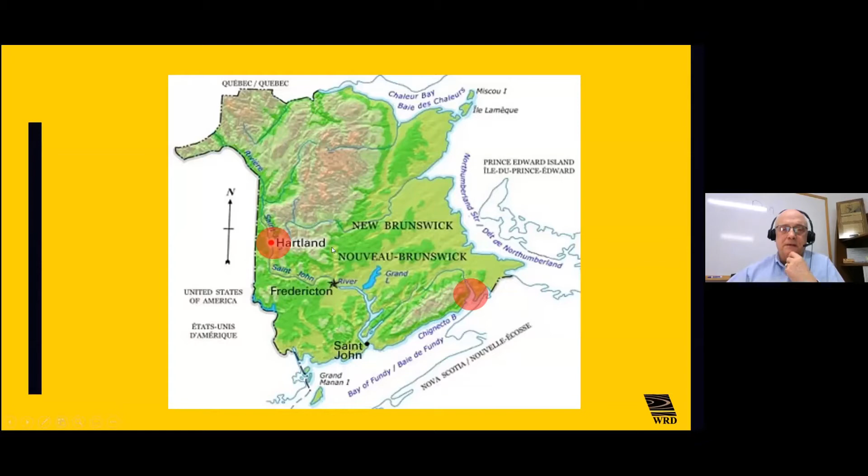And of course, in New Brunswick, we are famous for our longest covered bridge in Hartland, New Brunswick, which has been around for a long, long time. And we should be famous, without even knowing it, for other mass timber projects like Bell Dome up in Belledune—a 535-foot clear span, 12-story building for coal storage where SO2 is an issue, and potash where salt is an issue. Here you can see in Sussex and Saint John large timber buildings, which engineers, architects, and owners have understood for a long time provide a rigorous resistance to different types of corrosive environments. Timber has been shining through in that way for many, many years, decades.

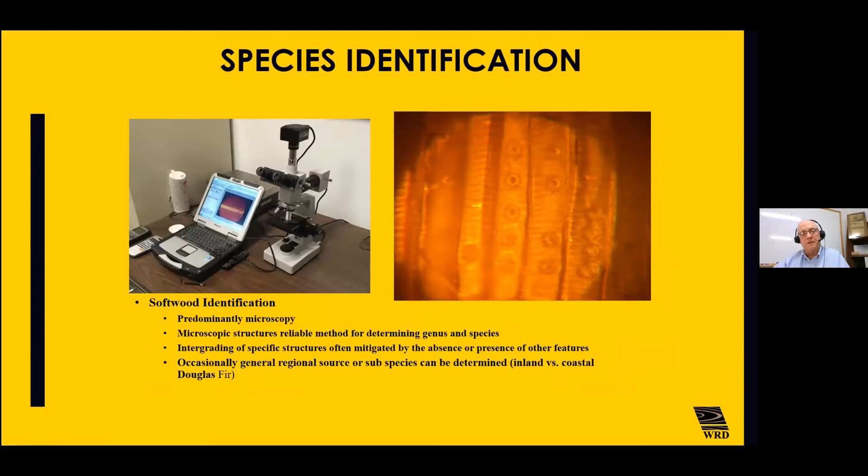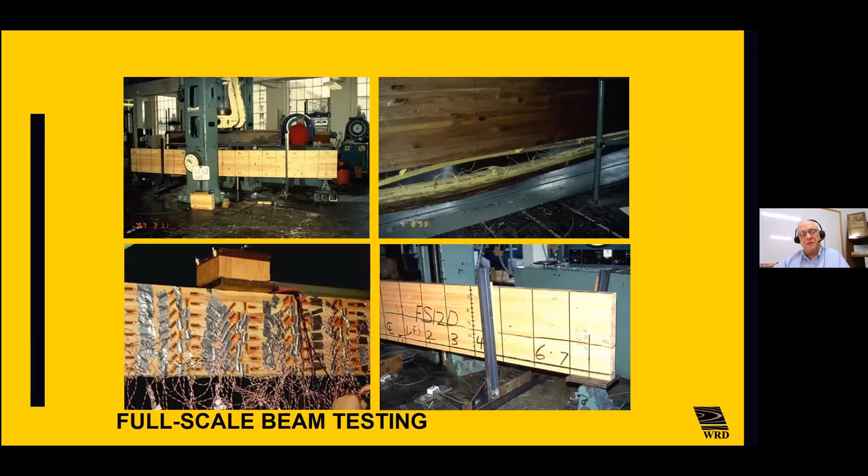Wood Research and Development, who I work for, is a code-certified test lab and third-party IAS, International Accreditation Service lab. We also have a strong, large commercial timber structures and engineering division, and we work from the small to the large in our lab. We get pieces of wood and people ask us to identify the species and grade. We look under a microscope at the smallest portions of a piece of Doug fir, for example, where you see spiral thickenings on the cell wall—a dead giveaway for Douglas fir—through to other characteristics we look at to identify wood at its smallest and minute level. From there, we go to the big levels, testing full-scale beams with our big beam testers, where we test reinforced glulam beams and other large timber products, strain gauging them and measuring deformation under deflection to understand their physical and mechanical attributes.

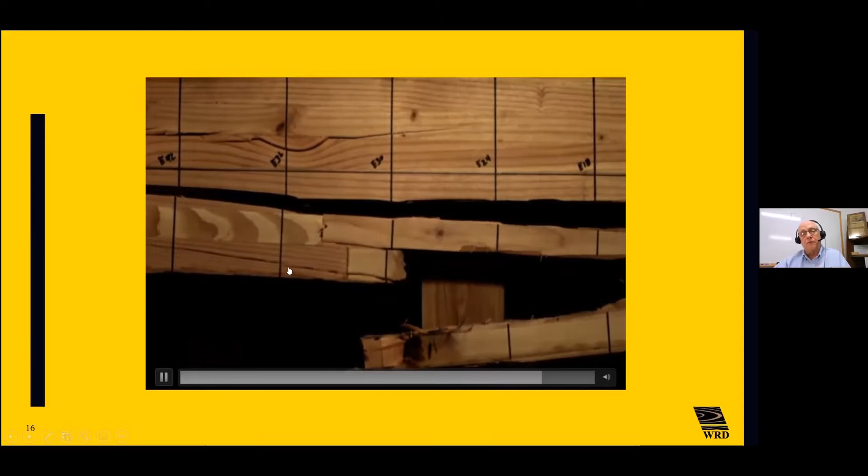This often leads to understandings about shear stress distribution in beams, using high-speed video where we take a post-trigger and look at the effects of stacking two finger joints in the bottom of a glulam beam, and the effects of joining a very dense and a not-so-dense lamination with a finger joint. Part of what we do at the lab is understand the response mechanisms to load and solid sawn lumber—how to fix solid sawn, for example, with high strength fiber—to establish design methodologies for code approvals.

Part of our work at the lab has been producing and developing high strength fiber using carbon, glass, and aramid, that's Kevlar, to produce high strength fiber layers that we can use strategically in different wood and wood composites, where they're 5 times the strength of steel at a fifth the dead weight. They come on a roll, you can stretch that roll out 2,000 meters if you want, and cut it in pieces and put it where you want.

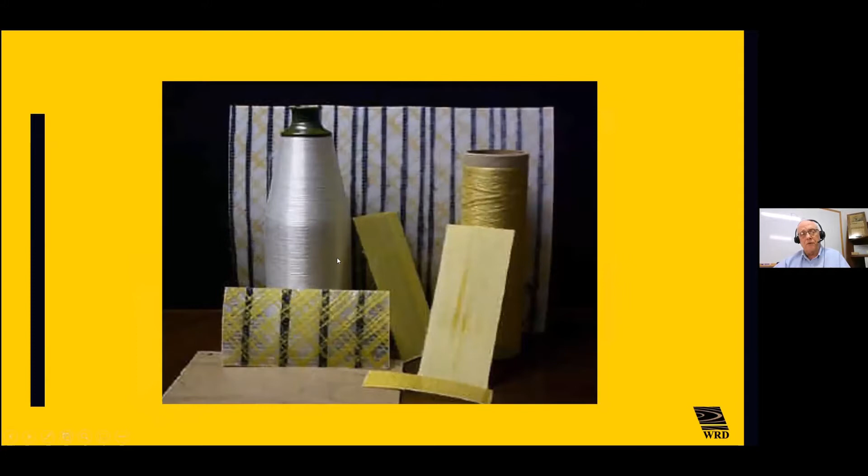So this has led to, well, I don't want to brag, but it's important to know that what we talk about with wood and ways of reinforcing it is bona fide. In '96, we were nominated for the Civil Engineering Research Foundation Charles Pankow Award for Structural Innovation, and in '97, the Construction Innovation Forum Award for all construction products. We were fortunate enough to win both of those back-to-back, the first time ever won by wood in the world.

That was the beginning, in many ways, 25 years ago, of this great move we see back to wood now in this last decade. This has led to other award-winning projects like the Nappan job near Amherst, Nova Scotia, and the Roger Bacon Bridge, where we won the Merit Award two years ago.

This is an important aspect of protecting technologies, but again, as a Canadian, it's important for me to think about these things. We were successful with over 40 patents in this whole area of wood and wood composites.

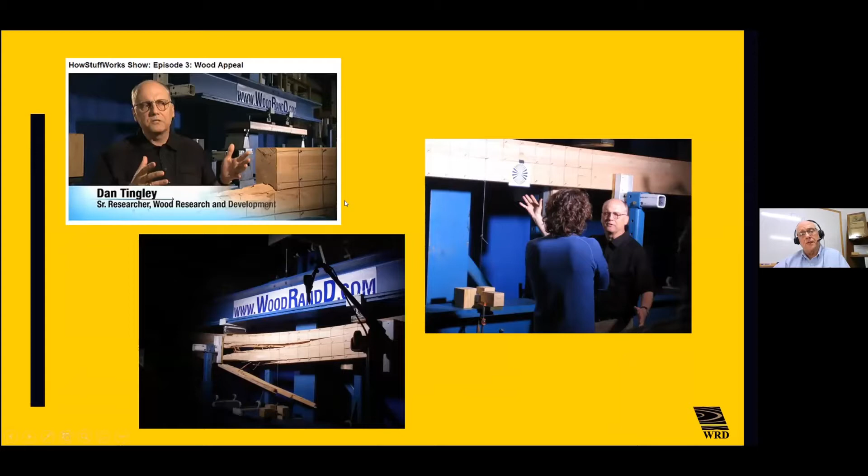So enough bragging. This has taken me through a career where, from HowStuffWorks on the Discovery Channel to being around the world looking at different wooden structures and helping people understand how to fix them, how to extend life, and understand what's going on with their structures.

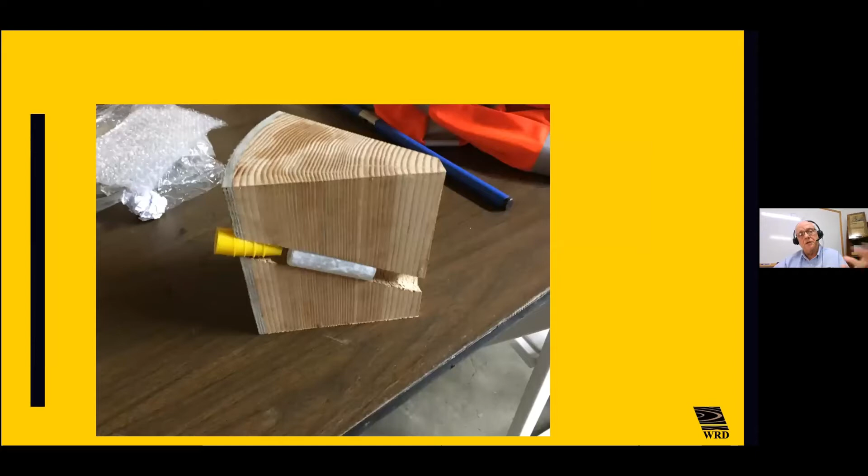As you can see, a class here in Salisbury, with a fellow from South Africa and a guy from Italy working together to develop a restoration for poles and wrapping for piles, diffusing and using naturally occurring salts to preserve and extend the life of species that are not treatable, like spruce. This leads to certificates of completion for people who attend.

So enough of that. Timber is one of the oldest bridge building materials that's been around, and both bridges and buildings have been built out of wood forever, it seems, originating back to the 1500s, even 15,000 BC. Timber, the material, is readily available.

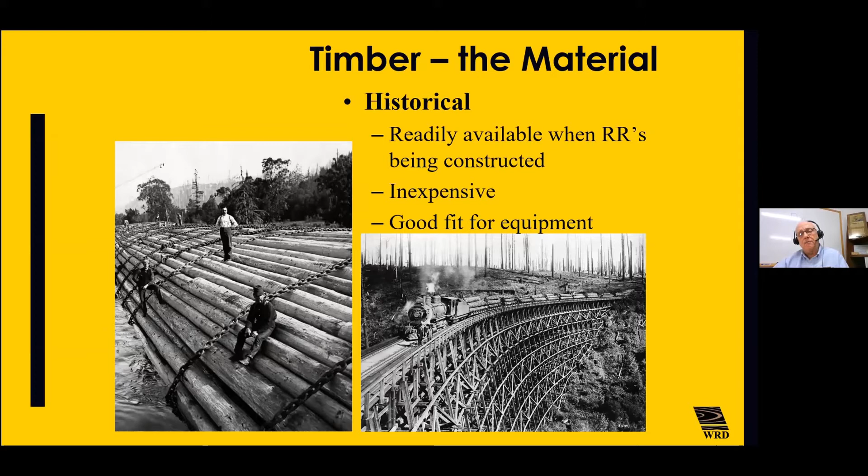Where you go, timber. In the old days, we used to build a railway across our continent, and we'd reach a gap, a river, or a big gully, and they'd cut down the trees that were there to build a bridge to get across it. This was the beginning, as it were, of the use of timber in a more capital infrastructure way. Timber formed the backbone of how we build things and what we use as a material to design with.

These are the important aspects of our history with timber. The breadbasket of the world really became the northwest part of the United States and the western part of Canada, where these huge trees were felled. You can see one tree, one train - it was location, location, location. It was about where the wood was, and that was what you used, because it was local and people could get at it, machine it, design it, and build structures with it.

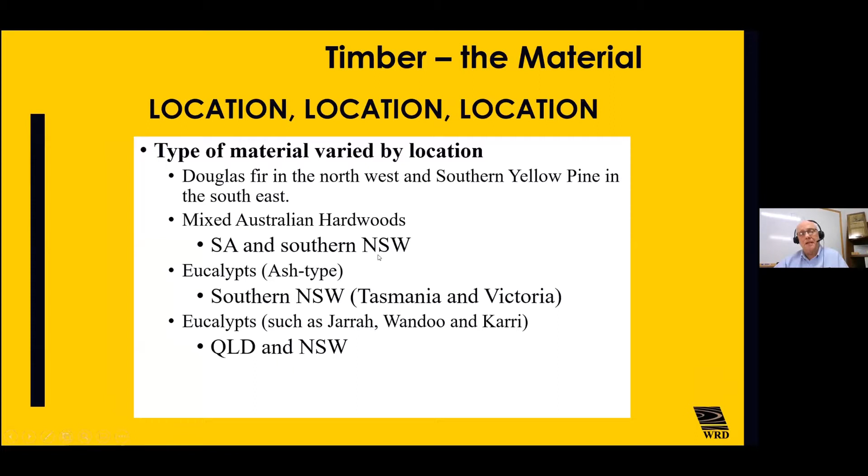As you can see, the size of the Doug fir here cut down, these are some big trees. And I often say, if you can't make money cutting trees like this down, you want to get out of business.

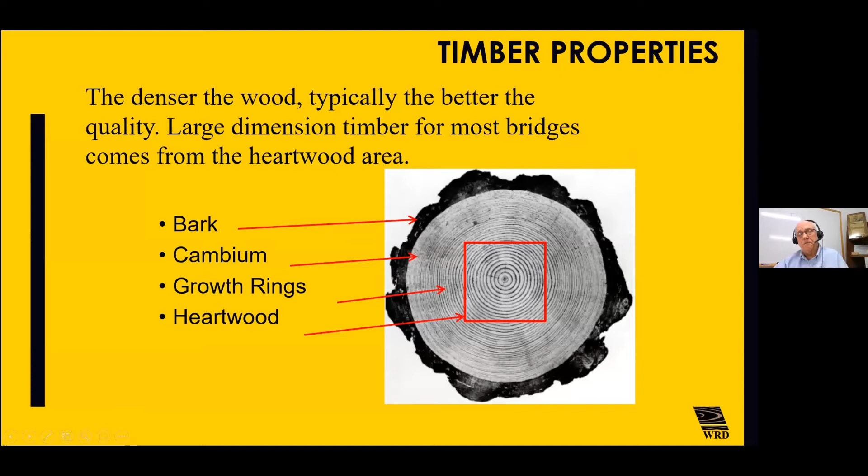Huge trees providing a breadbasket to build the world, as it were. Trees have timber properties and they kind of grow the same way. They get bark, they have cambium, the growth area in the log, and there's growth rings, heartwood and sapwood. This breakout of a timber cross-section of a log is the same around the world.

Timber properties - you hear oftentimes the old growth timber, you refer to it as old growth. These are the old Doug fir trees, for example, and redwood and western red cedar - old trees that are large and growing at tight spacings. You often hear people say this old growth is gone, and this means we can't have strong wood. Well, that's just not true.

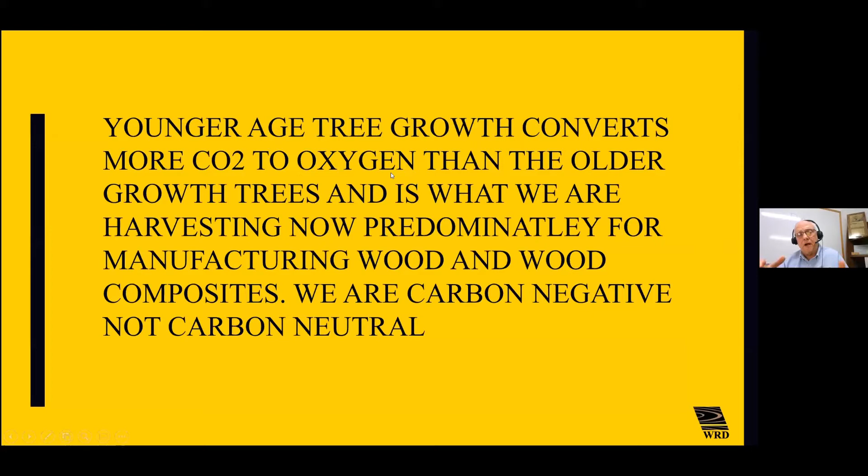Younger trees, for example, convert much more CO2 to oxygen than old growth trees, and we are carbon negative through that - we sequester carbon. Our old trees are good to walk through and good to keep for the heritage, but really the regenerating trees that we plant 2 for 1, that we can then saw down and make into things, make into composites of wood, are the way forward for us, because it's sustainable.

Taking these regenerated trees that are planted 2 for 1 and growing forest with them allows us to sustainably create building materials and not pump CO2 into the atmosphere, but instead convert it to oxygen and sequester the carbon, keeping that carbon sequestered in structures that we build around us that are aesthetically pleasing.

So we often say good wood is gone - it's harder and harder to find, and quality wood is just not there because we have to deal with regen. Well, I want to tell you that it's far more common with wood structures that it's how we design, manufacture and work with this that causes the premature failures than it is the wood. It comes from a lack of understanding.

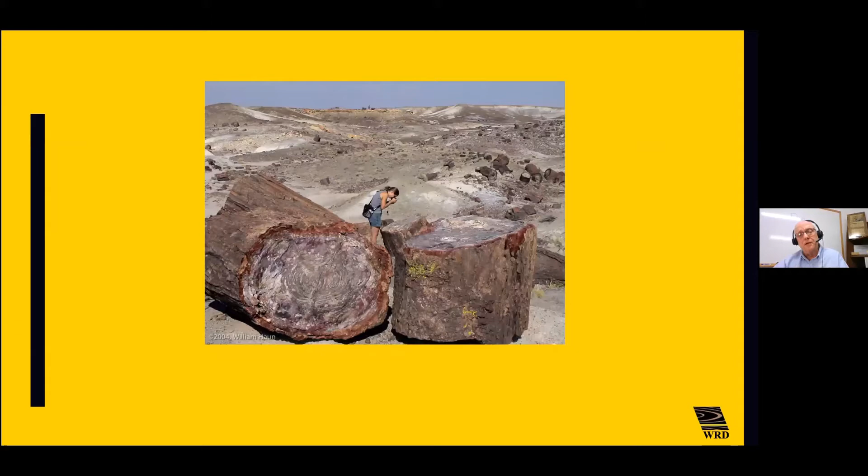I often show this picture of the petrified forest in the national park in Arizona, where Doug fir trees are laying in the ash that have been uncovered from the winds of time. They kind of got together in the great inland ocean. When the ocean receded, they settled and mineralized and formed into agates, basically becoming petrified. They've studied these petrified chunks of log and found out that these Doug fir trees were growing 250 million years ago, the same way they're growing today.

And those trees have not changed in how they grow. They basically have the timber properties that originate from how they grow - cambium and growth rings, for example, and rays, and early wood and late wood. These cellular structures are what forms up timber. And timber has 3 principal directions of strength - it's anisotropic, meaning it has different properties in different directions. It's got a radial direction, a tangential direction, and a longitudinal direction.

In the radial direction, the modulus of elasticity and tension is different than the modulus of elasticity and tension in the tangential direction. And if you try to design timber like you design steel, you're going to make some serious mistakes. And on top of its anisotropic nature, wood also is hygroscopic.

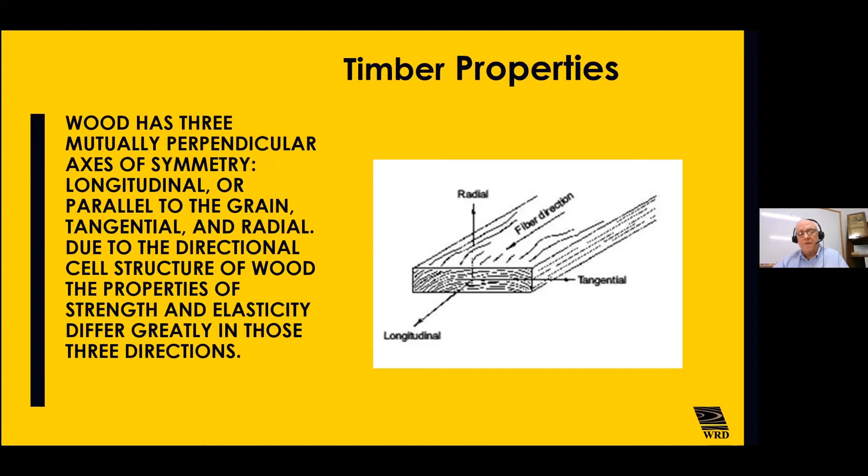It breathes in and out moisture. After all, it was a living organism in its origin, and it breathes in and out moisture and equilibrates with its surroundings. So those 2 big factors are important to consider when we design with it. It's a collection of cells bound together by lignin, the glue, and this collection of cells has properties that are related to its orientation and how the cells and lignin formed it up.

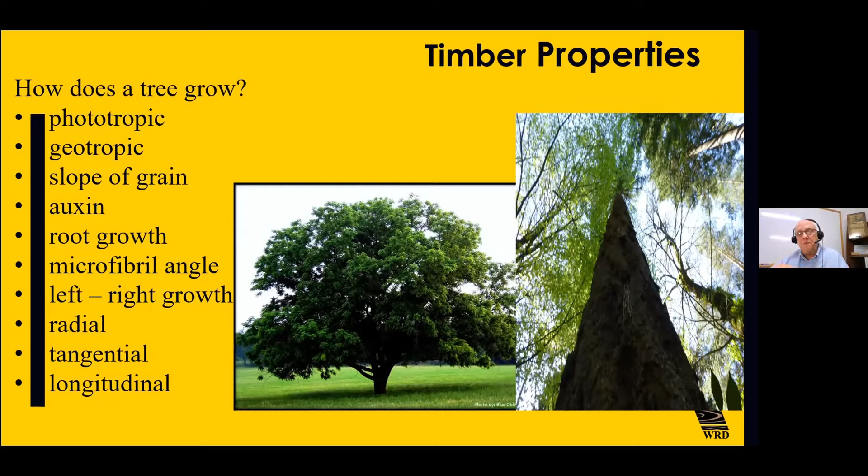Timber's properties, for example, between hardwoods on the left and softwoods on the right - the softwoods are geotropic, and they grow in response to gravity, straight up and down, so they tend to have less slope of grain issues. Hardwood trees on the left are phototropic - they reach for the light. They tend to have more slope of grain issues, even though they're denser and more complex. These aspects of timber are important for engineers to understand as we design with it.

This anisotropic slope of grain and strength issues that relate to how we cut pieces of timber out of the log are also important, because slope of grain relates to cutting a straight piece of lumber out of a tapered or round bolt or log.

Timber is hygroscopic, meaning it breathes in and out water. There's a point where it's giving off water, cell water, what we call free water or lumen water, where it doesn't shrink with change in moisture. When we get down to cell water, that's the bound water in the cell walls. When it loses moisture from that point, it shrinks. That's called the fiber saturation point, around 25 to 30% moisture by weight.

When wood drops below that fiber saturation point, it begins to shrink, and as it moves in and out of moisture below that amount, it shrinks and expands. So we take engineered wood products like glulam beam, manufactured between 12 and 15% moisture content. One key reason is because that's right in the middle between the fiber saturation point and zero, meaning it shrinks and expands the least amount.

It's more stable. LVL and some other engineered wood products are made at 8 to 10% moisture, drier than glulam, or what we call structural kiln dried wood, which is dried to 19% or less. Different types of engineered wood and different types of sawn wood are at different moistures. So when I hear the term 'wood is kiln dried,' the first thing I say is, kiln dried to what?

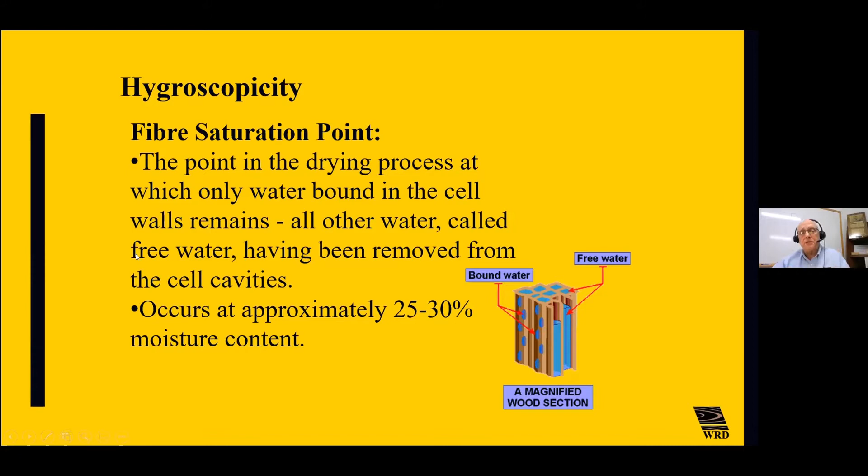This fiber saturation point is a critical point - why? We have to understand that wood shrinkage longitudinally is negligible, but its shrinkage tangentially and radially is very important. It changes the game, as it were, on multiple story buildings, for example.

Rays transfer moisture in and out of the radial section of the tree, and they're kind of nature's natural fault line as the tree shrinks and expands. That's where you see these non-structural defects forming in timber. If you don't know this is a non-structural defect and you're looking at this log in a log girder bridge system, the first thing you're saying is it's shear failed.

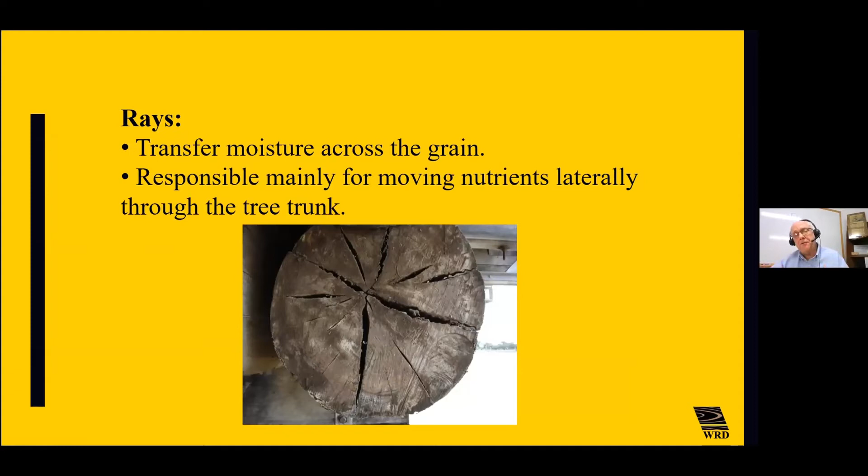Well, that's not shear failed at all. It's a naturally occurring shrinkage check, because at the end grain, travel of moisture is 100 times faster than the side. That tends to lead to end checking and end feathering.

These vertical cells that take moisture up and down the tree kind of move along naturally. Just because the tree is cut down and sawn into timber doesn't mean moisture isn't going to move through the cells. So when you put a pile or a column in the ground and it gets groundwater, the water moves up in that tree the same way it did when it was living, by capillary action. Water moves through and in around wood a lot.

The specific gravity of wood is the ratio of the wood's density to the density of water - that ratio is unitless. Wood has all kinds of different specific gravities. Some wood, like ironbark, sinks when you throw it in water - it's denser than water. Other woods, like balsa and western red, are a third the density of water. Typically this density is related to the wood's characteristics and strength, but other localized defects like knots and slope of grain will also impact that design property in the wood.

These properties related to density usually mean that the heartwood is kind of more inert, and the sapwood is kind of more open to moisture travel and permeable. They impact the quality and condition of our elements as we use them.

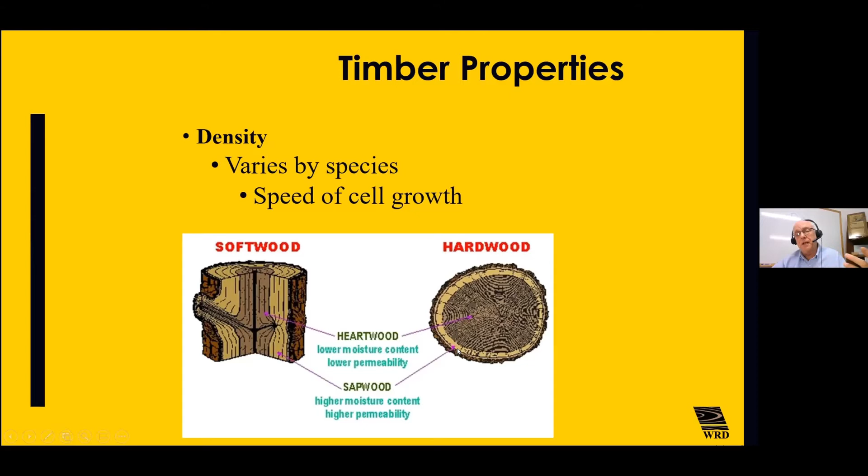Typically in days past, wood was sawn around - we'd take a big square bolt out of the center after we cut the jacket wood, as it's called, into the kind of higher grade wood, because there'd be fewer knots. The boxed heart timbers were used to build bridges, heavy timbers for post and beam homes, for example.

Timber properties are affected by knots, splits, checks, temperature, moisture - all impact the design properties. Most of these design properties have been developed from understanding things like wane and knots and the size of knot in a section, and things like checks and seasoning issues. They're reflected in the design values already published for use by engineers.

Other things can affect timber, like temperature, although it's got very good resistance up to 150°F in terms of its strength.

At extremely low temperatures, if it's green, wood can shatter because of sudden impact. For example, in the deep freeze up in the boreal forest, like in northern Canada, when cold comes in quickly before the tree's moisture content has dropped into its roots, you can hear loud reports where trees literally split because of freezing water in them. So temperature does impact timber, but not to the extent it would in steel. Its coefficient of thermal expansion is much, much lower than steel.

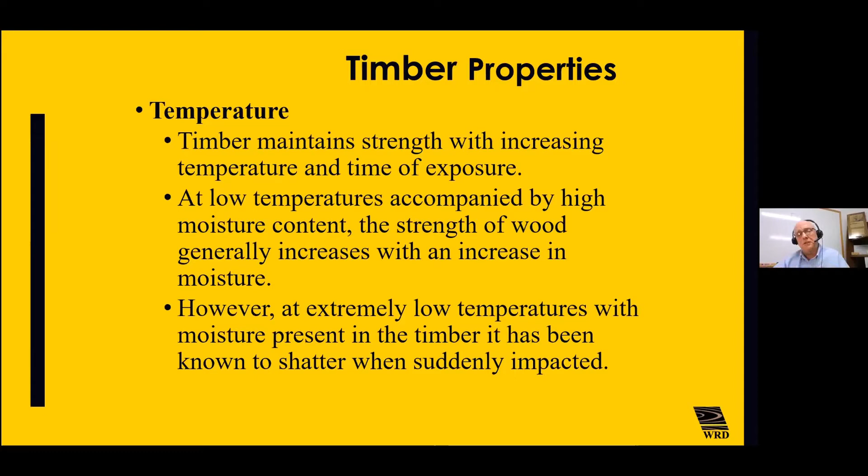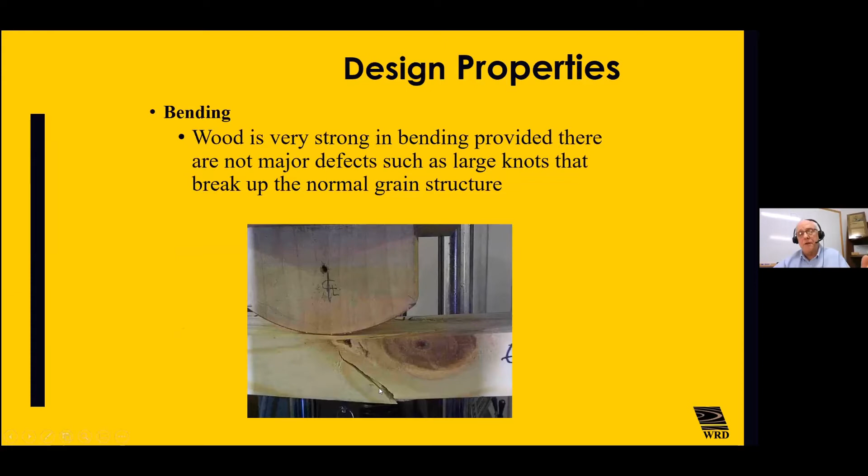A timber's properties are also impacted by moisture. Generally, modulus of elasticity and strength increase with a decrease in moisture content below fiber saturation point. Wood's bending properties are heavily impacted by knots and slope of grain. If you have bigger knots in a smaller cross section, you have less strength. The knot itself is denser than the wood around it, but it's the slope of grain around it that creates localized defects leading to reduced strength and capacity.

The same goes for compression parallel to grain for columns, and the same for compression perpendicular to grain. Most people don't realize that compression perpendicular to grain strength values are a specific criteria. They represent the capacity of the piece to accept a bearing perpendicular to grain, and it's the stress that causes one millimeter of deformation. It's a specific characteristic, not a strength characteristic.

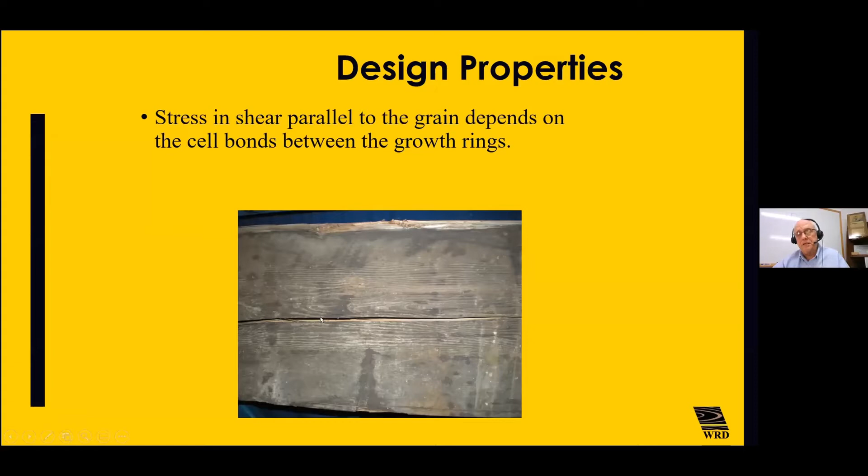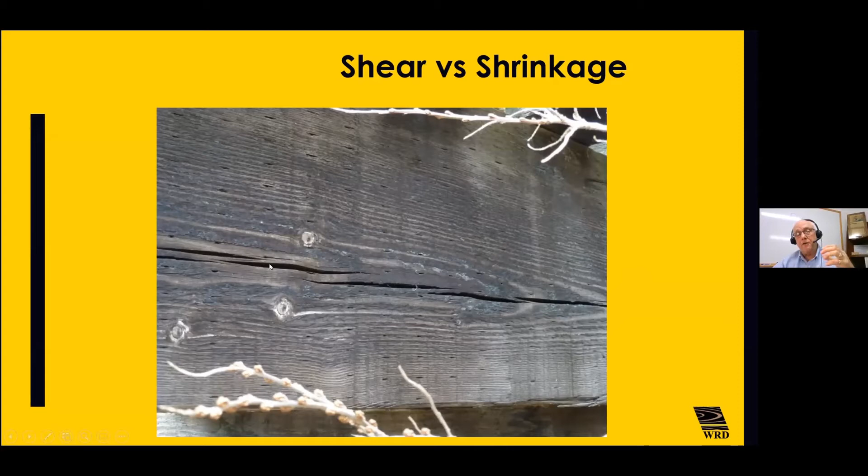60% of all horizontal shear failures in wood occur along the late wood, early wood interface, as you can see here - that's a horizontal shear crack. That's a horizontal shear crack. That one is not - that's a boxed heart with a shallow grain at this edge, and that's a ray. It shrinks as it seasons, and as it does, the cells circling the annual ring shrink and lead to nature's natural fault line, a ray, which separates at that point. That is not a structural defect. This is not a structural defect.

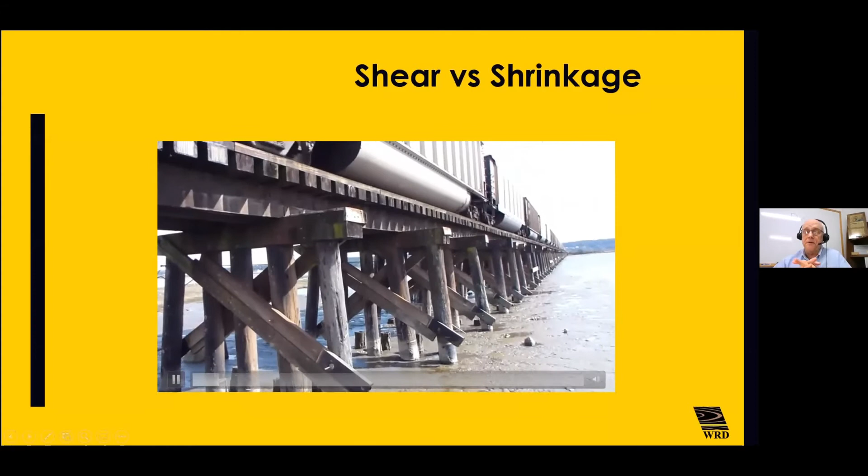So there's a difference between a shrinkage crack and a horizontal shear crack. This is a shrinkage check. This is a horizontal shear failure. I wish I had been able to see a video like this when I was in my undergraduate program at University of New Brunswick, because I always thought shear was a transverse deal since the formula has V times A.

That's horizontal shear, and it's overloaded because of heavy loads. The horizontal shear is rubbing the wood back and forth, and the white is the wood powder coming off. The vertical spikes from the top are from water flushing out that wood powder. That's a horizontal shear failure.

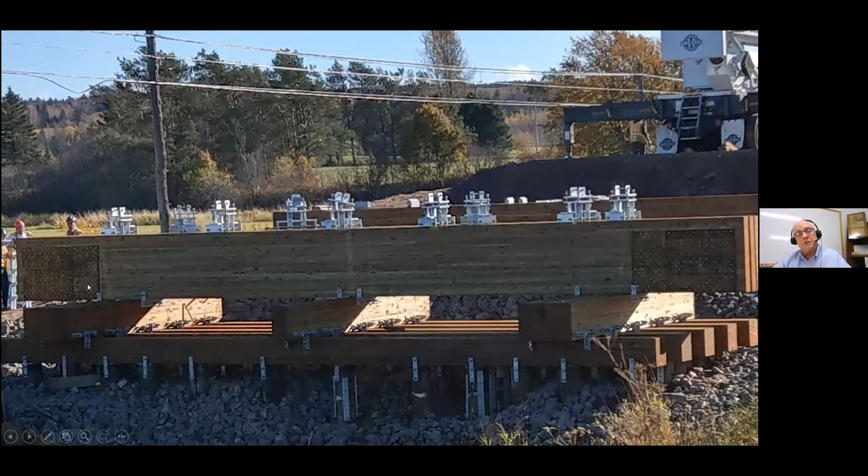Horizontal shear failures can be improved by adding horizontal shear reinforcement. As you see with this big cap here for the Nepean Bridge, we put a horizontal shear panel on, and that carries a huge point load. So instead of having to increase the size of the beam everywhere, we can strategically place horizontal shear reinforcement to increase the capacity of that piece at a point load and build the bridge more economically and effectively.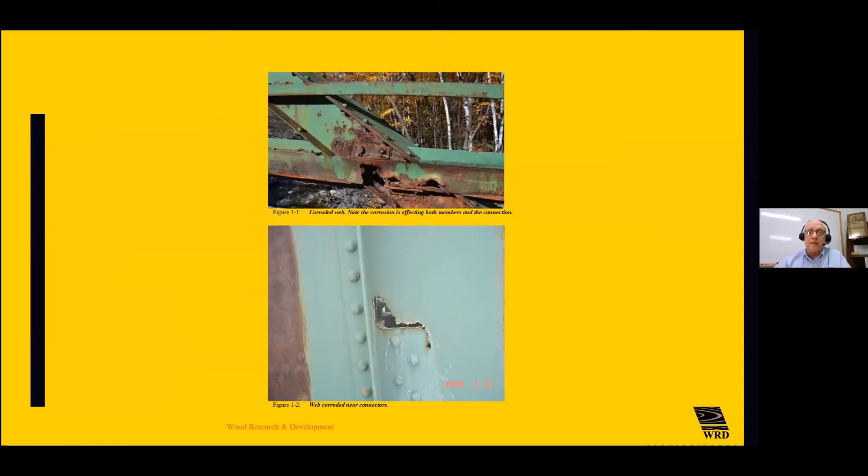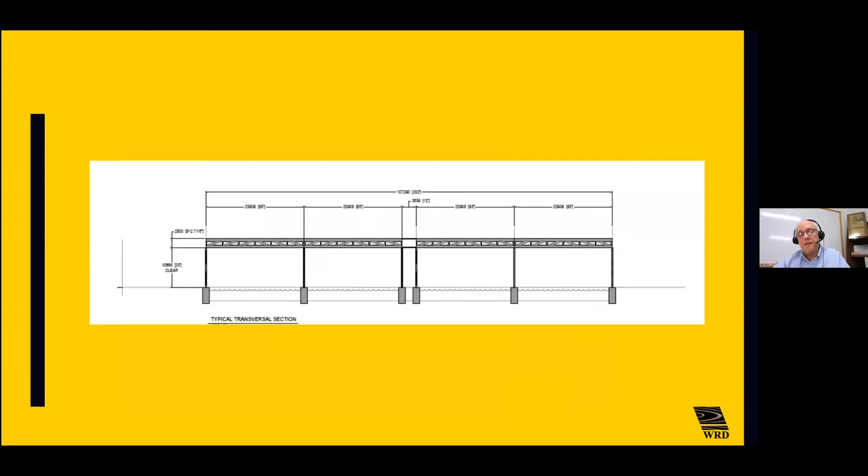Timber has naturally occurring resistance like this - it doesn't rust. That's why we use wood in swimming pools, for saltwater pools and chlorine pools, because wood has great natural resistance to these sorts of environments, like salt for potash terminals, like SO2 for coal storage. That's why we choose wood - because of this naturally occurring resistance that makes it the right choice for things like fish hatcheries, where we can produce naturally occurring wood products that are sustainable, carbon friendly, and will go the distance in hard environments, like a pulp and paper mill with steam.

These are all timber beams in the roof of this pulp and paper mill, because they know they do better in these environments. So timber can be quite durable.

Timber does not behave in a truly elastic mode when it's under time-dependent behaviors. That's why we have in its composite adjustment factors a DOL, duration of load factor, of 1.6, because timber tends to have a viscoelastic response, and over time will creep. And if you put too much load on it, then it can creep to failure. So we adjust for that.

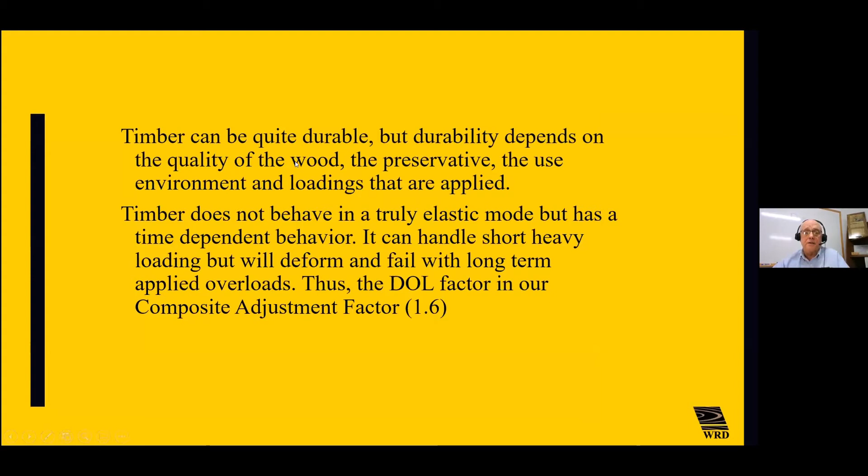So when people say that timber creeps and that you can't use it as a structural material, they don't understand that we've already accommodated that in our design values and in our composite adjustment factors, and that you can have timber carry loads.

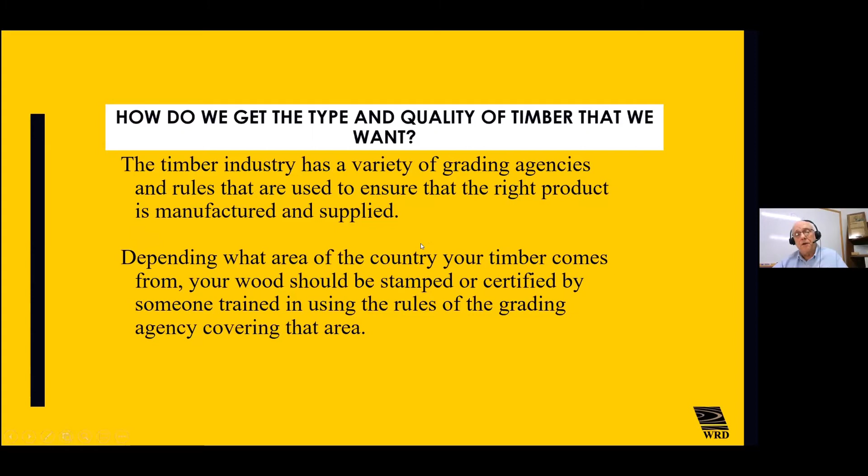Our design standards work like this: our National Building Code, our 086, our Timber Engineering Code, and then the Highway Bridge Code, which stands between 086 and the site, our Wood Preservation Codes. These codes allow engineers to go into the marketplace and design timber for people in different uses and produce for clients a working drawing set that will allow them to go out with a contractor and do the right kind of job at building their structure.

So who stands between the designer and the design codes? Well, there's grading agencies. These grading agencies provide ways for manufacturers of products to be able to grade their materials so that they put a stamp on it that relates to the drawings that the engineers have used, because that stamp and grade of lumber is covered under the design standard, and the engineer uses a design standard to choose the right choices for his design. And then he puts a drawing together and puts on that drawing what grade it should be.

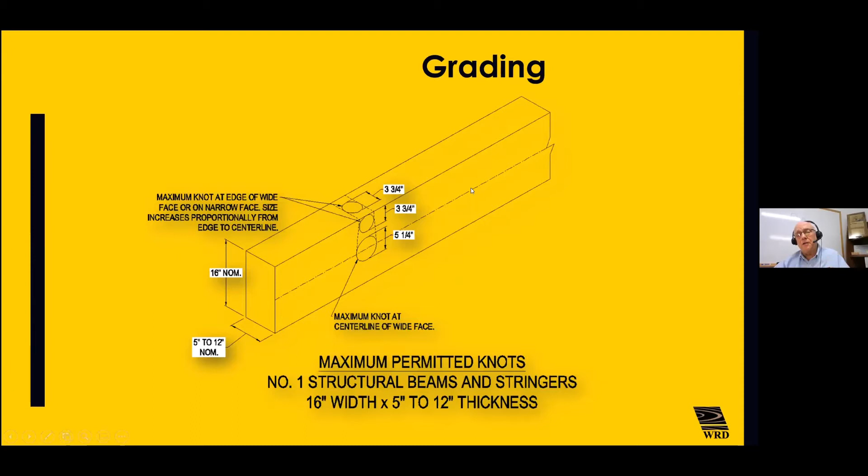I was never taught one time in my undergraduate and postgraduate training of 12 years that there was an upside down for a large dimension timber, that we put the bigger knots at the top when we grade them according to knot size and slope of grain. So if you don't, and you end up putting the big knots at the bottom by just not turning them right side up, guess what happens? Premature failure of pieces and around knots, which occurred at the bottom. And this is not good.

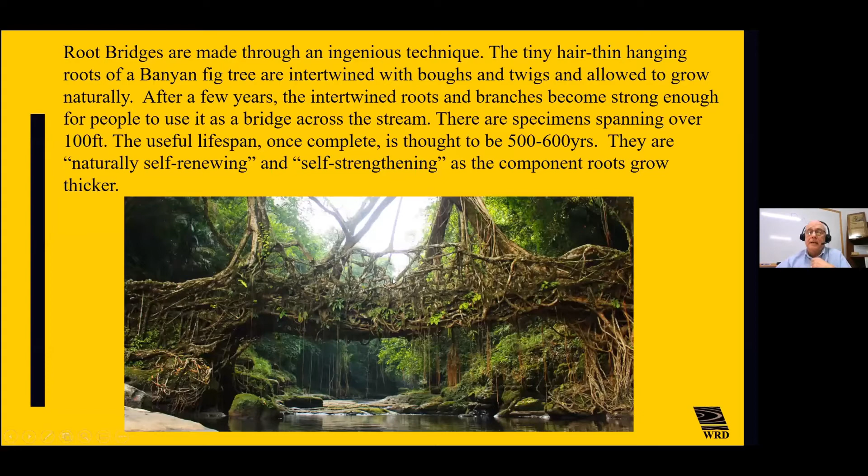So timber bridges and buildings have been around since the beginning of time. This bridge here, 500 to 600 years, it's naturally grown. It's Ficus elastica in India, in one of the worst environments for timber, but yet it's there for 600 years. They liked it so much, they grew a double-decker bridge, and then they grew their handrails.

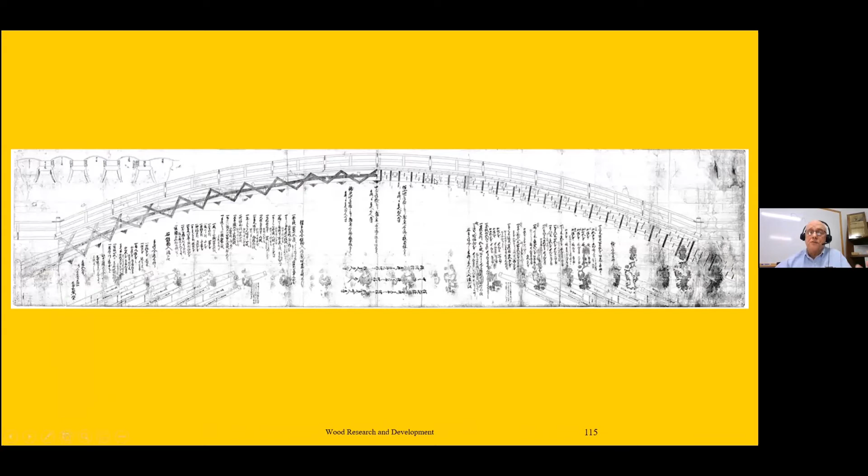And why is it lasting? Because they grow their connectors, because the devil's in the details. And this bridge, 500 years in Japan, the devil's in the details. It's a leaf spring bridge, and it's going the distance because it's properly designed, proper ways for water to get off, and it's reflected in its design criteria of getting newer.

So if you're designing bridges and buildings to accommodate proper characteristics under different environments, you're going to have longevity. It's not timber's fault. It's not wood's fault. It's how it's designed that's at fault.

23 million. They asked us to come in and take a look at it. The deck had been replaced 3 times. It was concrete, the wood was still there, and we could only find 3 bad actors in the whole bridge system. They're fixing it now for 4.3 million. So being able to get longevity is what bridge and building owners are looking for.

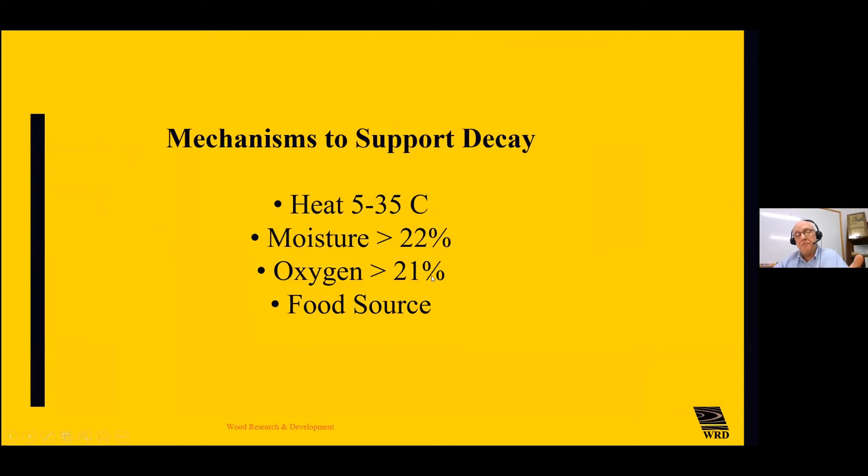Mechanisms to support decay are heat, moisture, and oxygen. If we don't have any of these 3 items, the wood is the food source, then wood doesn't decay. The spores are on everything, on all pieces of timber. They grow a hyphae that has a foot at the end of it and secretes an enzyme that breaks the wood down.

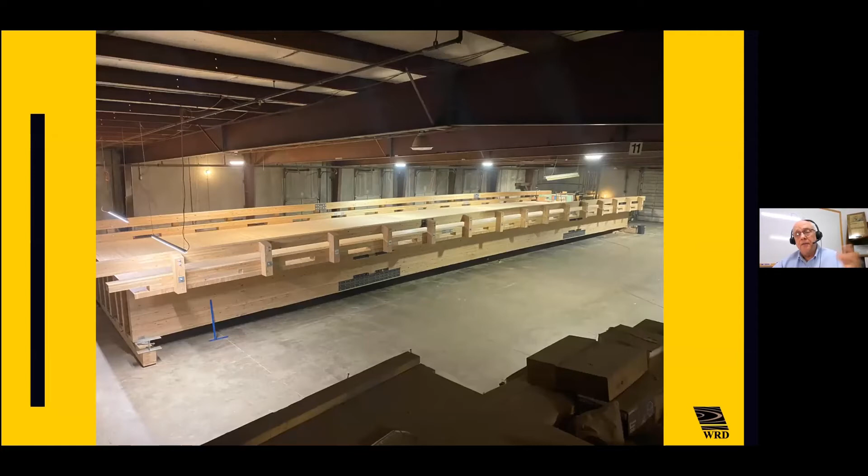And we don't want that natural cycle of life to occur in our products. So one of the things we do is we pre-manufacture and pre-assemble and pre-machine our bridges, for example, in a factory, and then take them all apart and post-treat them. So there's no bright wood, untreated wood. And then that bridge can have a 100-year design lifetime.

When it gets in service, it goes together much more quickly and effectively, as you can see here, producing something that's naturally aesthetically pleasing, that's going to go the distance and carry heavy truck traffic. This bridge lasts the length of time. Instead of shipping a bundle of treated wood to the site, machining and cutting it, and leaving all kinds of bright wood that leads to decay, we short circuit that problem and do it in advance and post-treat.

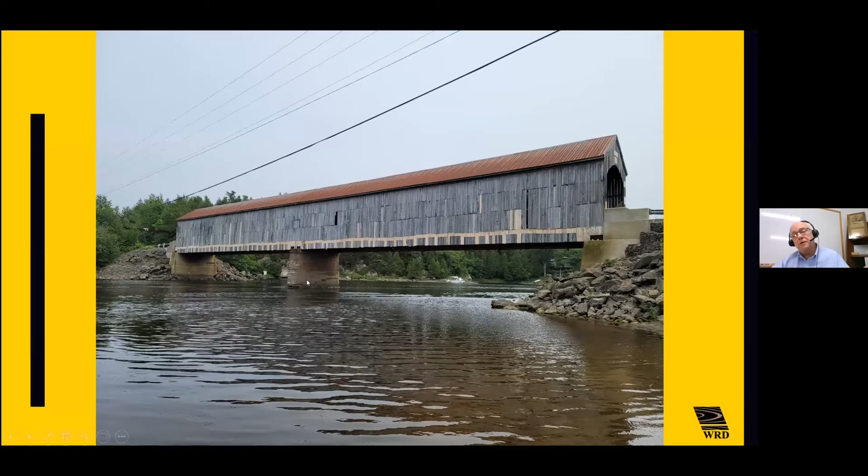The early designers realized that their way of doing that was to put a roof over it. So all the covered bridges, for example, in New Brunswick - this is Milky's, that I designed a restoration for. The early designers from Europe realized that if I had a Howe truss and if I put a cover over it and kept water off the joints, I could have that bridge last a long, long time. And that's why bridges are covered - it keeps water off the joints.

And so in buildings, we do the same thing with outdoor structures - we keep water off them. We did great work in Vienna, the wave. You can see we keep water off it by putting a roof over it.

This is in Switzerland, a beam set I designed. You can see the depth of it. We used strategic oak shoes, and strategic placement of high strength fiber, and allowed this building to be built at a reduced cost because we wanted to do a more effective job.

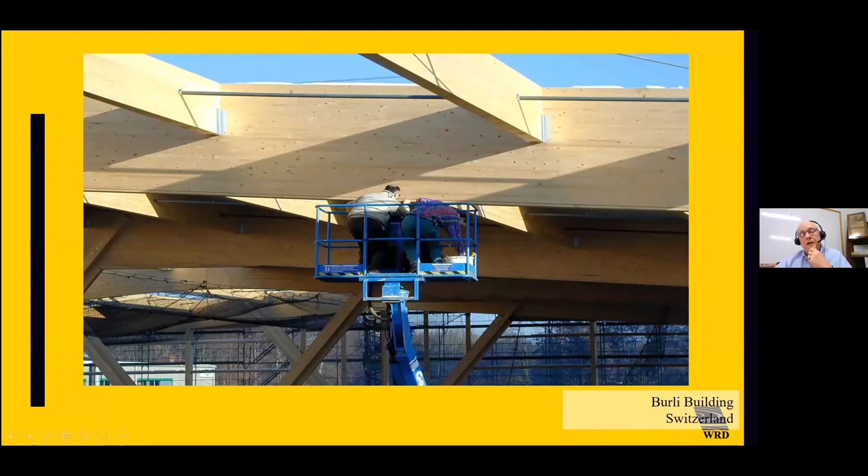You can see back here where I have hair, actually brown, doing some quality control checking on big beams. These are big, what we called in the day, post and beam glulam structures, which we would call today mass timber. These buildings have been going on for decades, since the 50s with glulam beams. This one was built as half the length of beam, some of the biggest beams ever built, and built with low-grade blowdown wood for McDonald's.

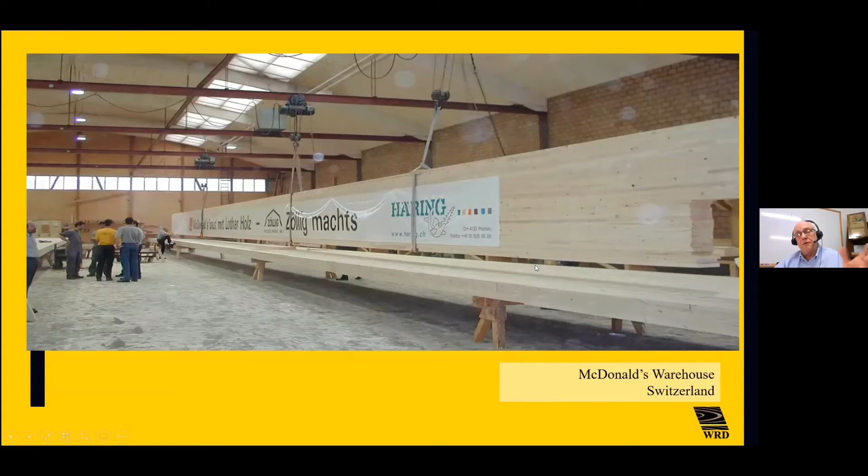We parked them across the Autobahn, and we installed this roof system in about 7, 8 days using this blowdown wood, McDonald's building with high winds wood.

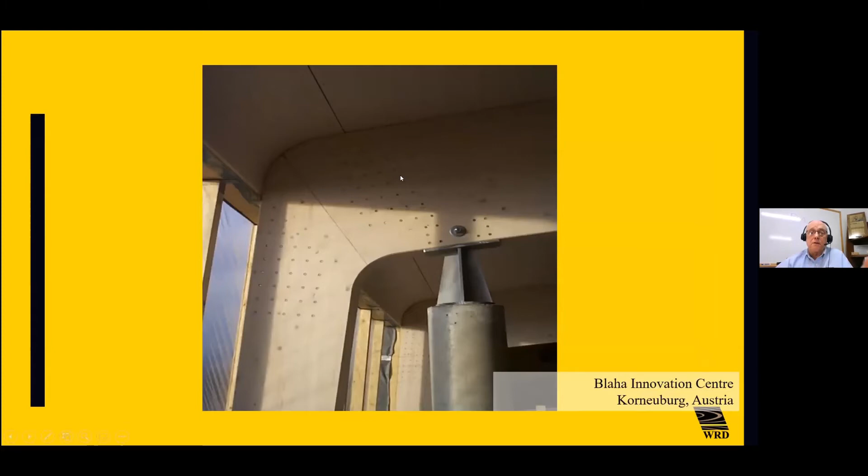This is in Vienna, another design I have out where I won an architectural award for, where we had this kind of pinned rigid C shape and reinforced in a starburst of dowels, you can see here, to try and get the look we wanted and the performance we wanted.

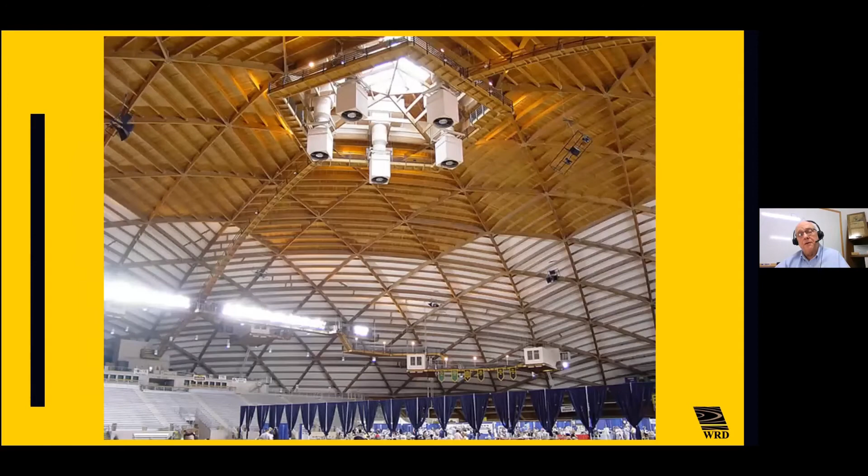These are the old panelized roof systems that we used for decades that were supplanted by steel and bar joist in the mid to late 90s, which are now coming back again, providing for cantilevers for good mechanical advantage with drop-ins. And you can see these sorts of buildings, big dome buildings, kind of testimony to what we used to see - Tacoma Dome, in 4 decades of work.

Understanding timber and how it's changed over the last decades is pretty important, because we've come kind of full circle. At the turn of the century, 82% of bridges were timber. Now 1% is. When I graduated in the early 70s, we were building post and beam and heavy dimension timber. Over a process of time in the bridge market, the precast concrete bridge girder system came to play, and timber was pushed out.

Today, that's changing as people look at things through a carbon lens and think of things from a sustainable point of view. They think of it from a maintenance point of view, from a capital cost point of view, and timber is coming back. In that four decades of dropping interest in timber, universities stopped teaching students about timber.

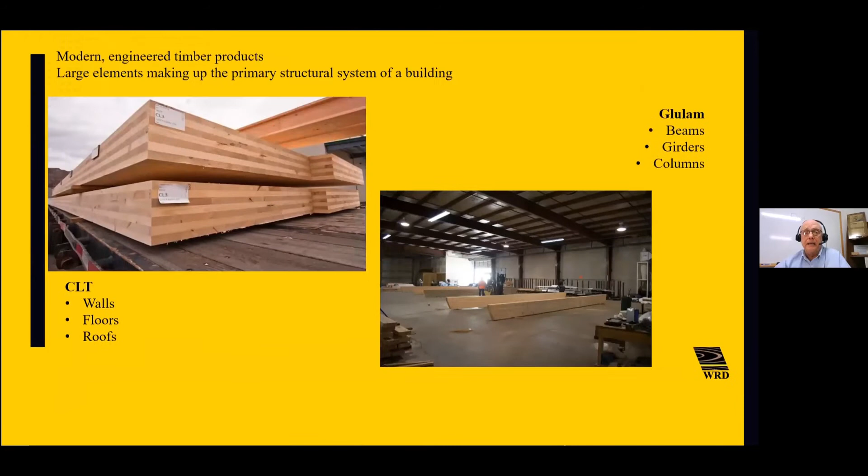Now schools are beginning to explore ways to produce additional timber education and curriculums, because there's demand in the marketplace today. And with that demand has come new types of timber products like CLT, another mass timber product that you see for walls, floors, and roofs, combined with glulam.

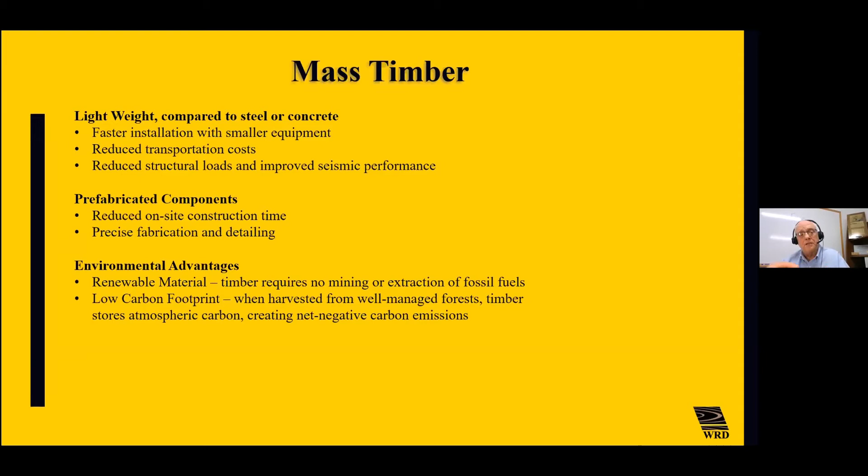Mass timber is lightweight compared to steel and concrete. It's faster to install, takes smaller equipment, reduces transportation costs, and reduces structural loads from dead weight. You can prefabricate the components like you see in my bridges, and these prefabricated components go together on site much more quickly. And of course, it has these great environmental advantages, to say nothing of the aesthetic advantages.

One of the key reasons over the years, including the Europeans and ourselves, that timber has stayed in the running and is now coming back is its dead weight. A concrete precast bridge is eight times heavier than timber, and some concrete structures versus mass timber structures are five, six, and seven times heavier. This dead weight is a big factor in the design.

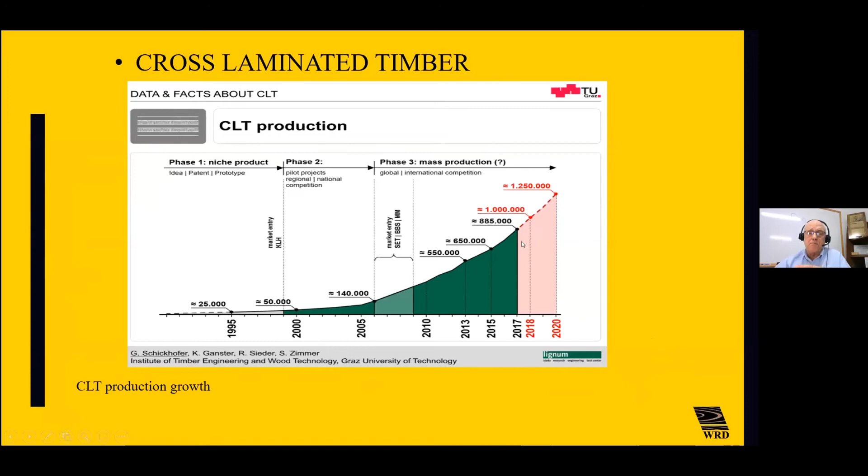This CLT production, which is part of the mass timber lineup, has really grown exponentially. As you can see here, this huge increase. There's a rush in the marketplace to produce this new material, and it's adding to the tool bag that engineers have had.

We've had parallel strand lumber, glulam beams, LVL, different types of engineered wood for decades. Now comes another kind of engineered wood, CLT, both in the heavy solid sawn timber lamination side and in the veneer side, as another tool for our tool bag to build these great buildings that look and feel and touch are so important to the community.

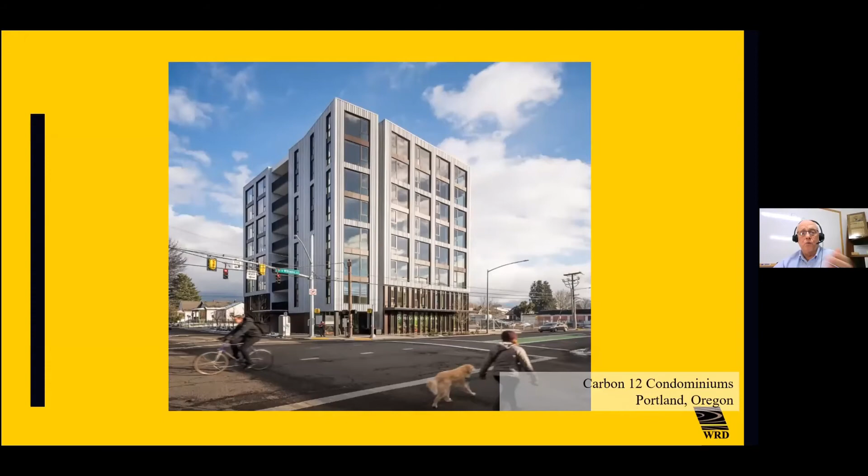Sustaining carbon by sequestering it, and having a sustainable building product, as you can see here in these buildings—a huge improvement over the way we build structures today, as we look at where we're going in the next few decades with pre-cut panels that allow us to basically form up high-rise structures.

Codes and universities are racing to keep up with the marketplace as we go to 20 stories and 30 stories. Now the Arabs are talking about a 126-story building made of timber. These are the ways we're moving in our industry today as we look down the path that we're on.

You can see these beautiful structures. This is kind of the way forward for us—tall high-rises, small to large in terms of structures, beautifully, aesthetically pleasing structures that combine sustainability, carbon sequestering, and aesthetically pleasing views that are healthier to be in and live in. This is our way forward, not spewing CO2 into the atmosphere, but instead capturing and sequestering it, as you can see here.

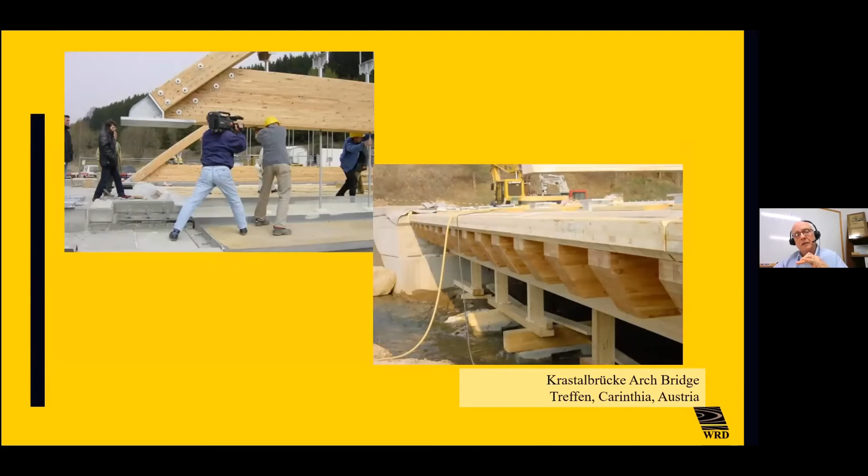This is one of the bridges in Carinthia, Austria, that I designed many years ago, going into place here. It has that look and touch and feel on the Roman road. That's where you want to be when you're building bridges.

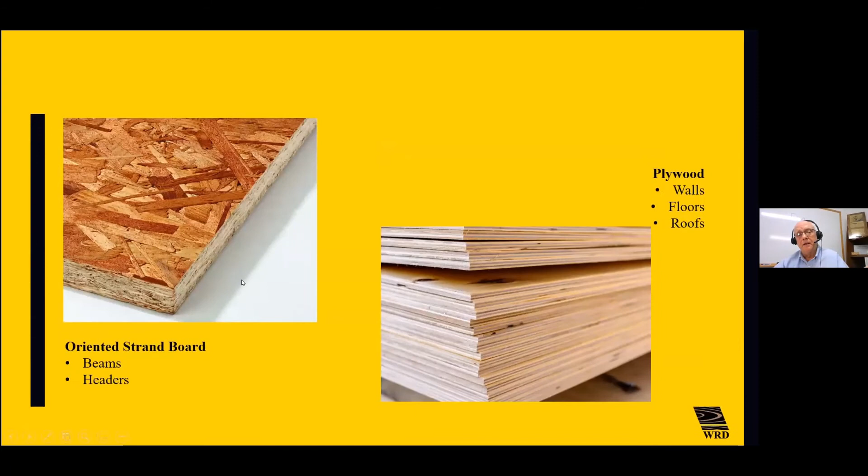Nail laminated timber is on the scene as well, producing another form of mass timber for engineers in their tool bag. Another material, dowel laminated timber, is another tool for their tool bag, to go with the LVL and Paralam tools they've had, oriented strand board, plywood that have been in their lineup, and the oldest of them, of course, solid sawn timber, which has been around for a long time.

The manufacturing of these new materials, however, brings with it some different design criteria and quality control criteria which we need to reflect on. Dry block shear testing is part of the quality control in the manufacturing of engineered wood. We need to assure ourselves that glue lines are doing the job.

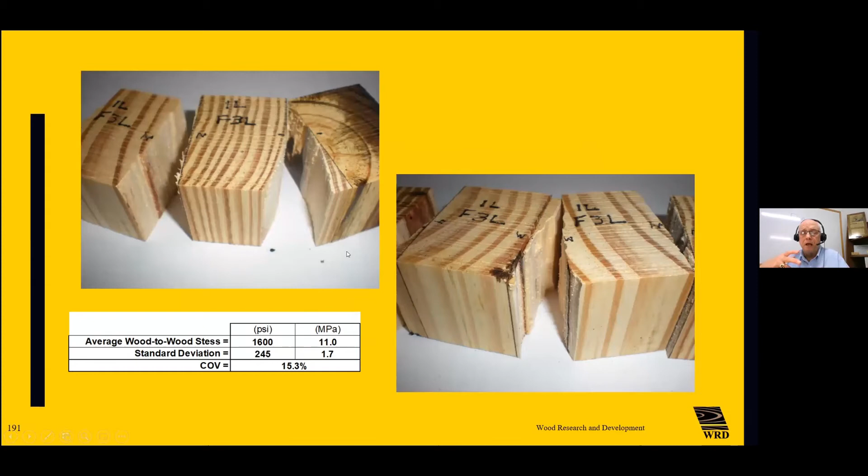We don't want delamination because wood is hygroscopic, breathes in and out moisture, and can delaminate if it doesn't have the right glue line. Part of this process of building these new materials is looking at things like the shear capacity between FRP, fiber-reinforced polymer, and wood, and then doing another step, which is cyclic delam.

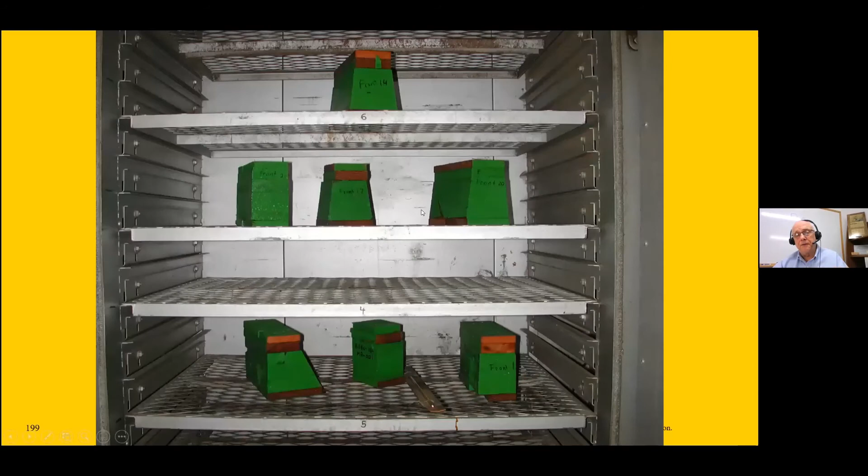That's where you put them in a vacuum pressure chamber and fully saturate things, representing the hygroscopic nature of wood, taking it from say 12 to 15% moisture, past FSP up to 30, 40% moisture, and then putting it in an oven. You can see the piece in here with high strength fiber, doing tests, putting it in an oven and drying it out back to 15% of its original weight and looking for things like delam.

And the wider the piece, the more potential we have for delam. The industry sets standards: after 1 cycle we have 5% delam allowed, after 2 cycles, 10%. So if you're over that, you're failing.

What's the significance? Well, if I have wood in my building and it changes in moisture content, we don't want the glue lines to open up and delam, because if plane sections don't remain plane, we're not going to have composite action, and we're not going to be able to use the design values we use to design the building.

So we don't want delam. We test in our quality control system these aspects of our beams, and we look for delam: pass and failure.

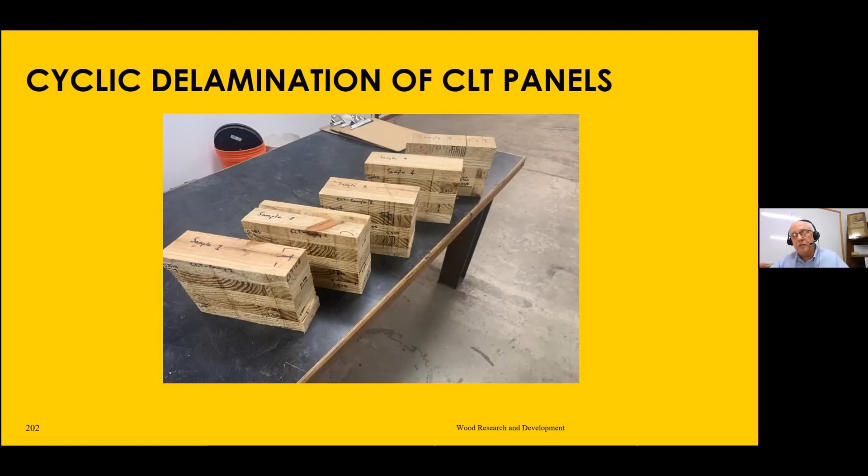When we look, for example, at CLT, most of it is made with polyurethane, and it's for indoor use. When I say wet service, I mean what happens when it cycles moisture, not whether it's going to survive in decay-prone areas like a bridge. And that moisture cycling resistance is pretty critical.

As you can see here, these are results from CLT testing. The polyurethane glues are not really effective in moisture cycling resistance, so we have to keep them indoors and out of wet service, and we tarp layers when we're raising up buildings out of mass timber. We don't want this cycling to lead to delam like this.

So if we want to prevent this, we need to move to resorcinol phenolic glues, and control the conditions of the effective width so that we don't have the extra width that leads to more tension perpendicular to grain, which is caused by differential shrinkage, where one piece shrinks a lot more than the other.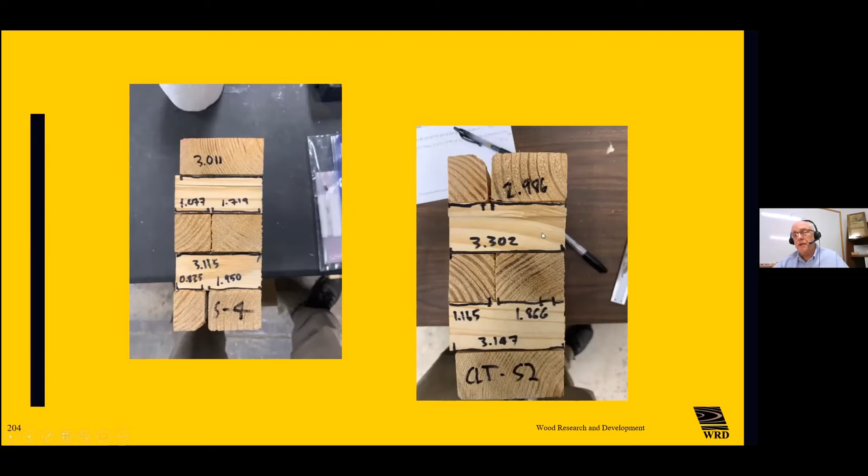This piece is shrinking here, say 3% from FSP to 0. Lengthwise, this other piece is shrinking next to nothing, 0.01. When you put a lot of shrinkage next to no shrinkage, it puts tension perpendicular to grain on that glue line and peels it.

We don't want that to happen to our CLT panels, so we understand this. Even two-way glulam beams can have shrinkage issues. In this particular case, the glue lines have been strong enough to cause the shrinkage to occur in ray lines and not in the glue lines, which is what we want.

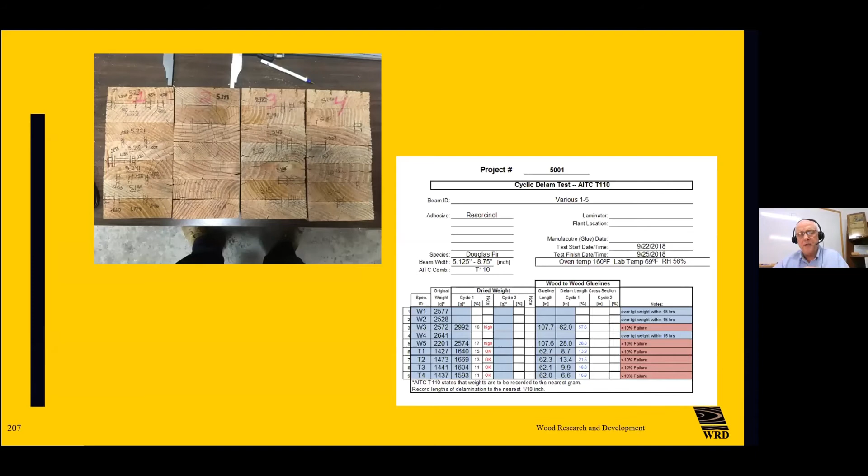Some places, as you can see here at the 23 and 15, it didn't pass. So we're watching these aspects of our engineered wood products pretty closely. It's important for engineers, specifiers and owners to also know these things, so that in their interactions with manufacturers, suppliers, and other engineers, they're thinking about these important aspects of engineered wood.

All of these different products have different strength values because we've orientated wood fiber in certain directions, and there are various design values from 30 MPa all the way down to 0.1 and 0.2. CLT has what we call a major and minor axis, meaning its strength in bending in the major axis, longitudinal, is different than its strength in bending in the transverse, almost triple the difference.

In its shear, for example, we might have a shear value difference of 2.4 for PSL down to 0.4 for certain types of veneer type mass timber, some as low as 0.1. These are huge differences, and we have to understand those differences.

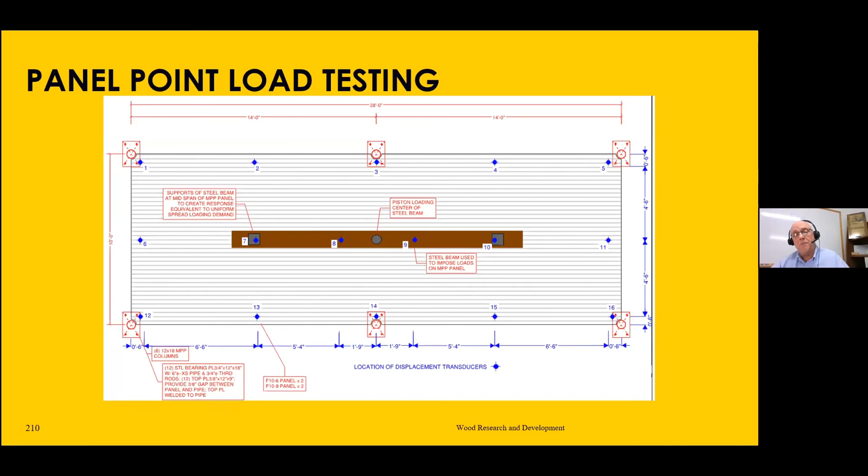A key point that I want to talk about today is panel point load testing. When we use mass timber for bridges where there's wheel loads, or when we use it, for example, in platform framing where we have a column underneath it, there's a major and a minor axis.

And we have to consider both. There's tests that we've established for CLT. As you can see here, this single piston puts two-point loads in a two-span test to simulate a column load underneath, like you have here.

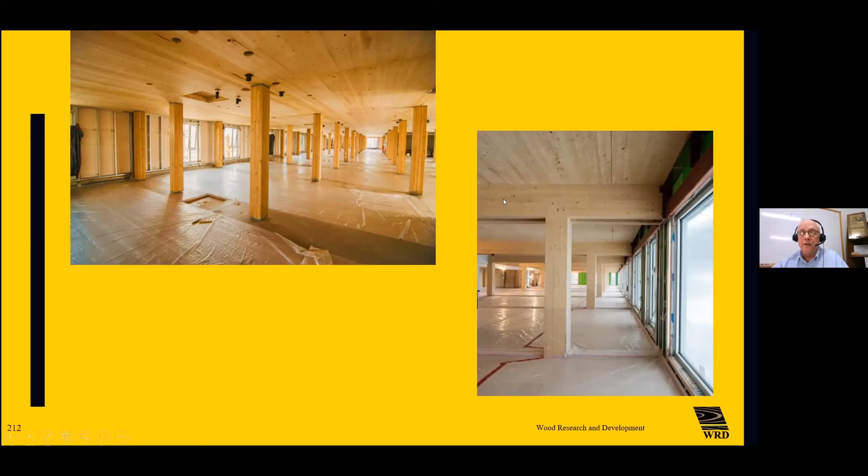So some of the tricks of the trade are things like ledgering, for example, to create this ability to have post and platform framing, as you can see here, used in this building.

When we look at the design values, where did they come from? Well, this is CLT - these are actual values from our test lab just the last few days. CLT transverse-to-grain shear in solid sawn laminations. These are ultimate values, and from these PSI values you get the design numbers of 1 or 2 MPa in LSD versus ASD.

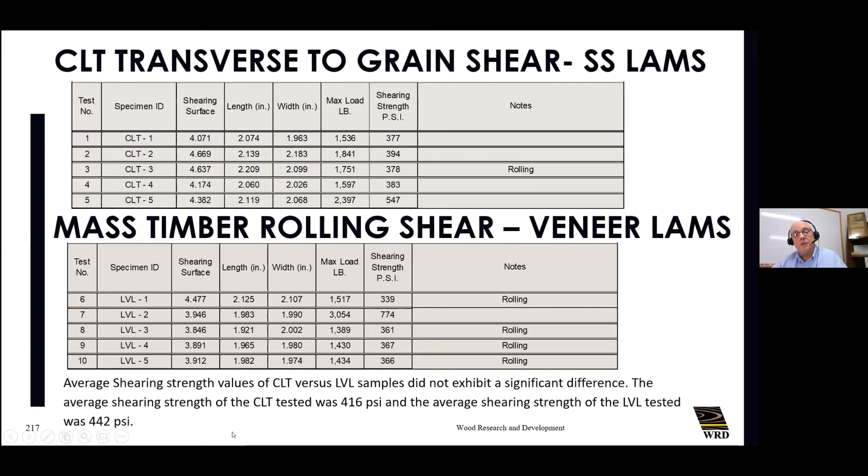This is mass timber rolling shear - this is veneer, and you can see here the same thing in this transverse, what we call weak or minor axis. A little bit better, but still very weak in this direction. Why? Because if I have a veneer or solid sawn CLT, when I put a shear line through here, in this veneer form, most veneers are rotary cut - a knife with the log turning creates veneers, and there are little knife checks that come in.

This, coupled with the loss of lignin strength, means they're like a line of barrels. When you put a roll stress - a shear stress - on it, they all roll. That's where the term rolling shear came from. Plywood has weak rolling shear, and so does mass timber veneer when it's got this cross banding. That's where you get the minor axis issue from - that cross banding gives dimensional stability, but creates a fault line in the shear.

Versus this shearing action on the lower right in a solid sawn element, you can see it here - a different way it happens, but it still happens in transverse.

So when you take this platform framing and have a column underneath where major and minor axis become a problem with point shear, one of the unique ways we deal with this - that doesn't involve doweling - is to use different composites of fiber that let us create a transition area for the biggest shear, using shear plywood and glulam facings, as you can see here.

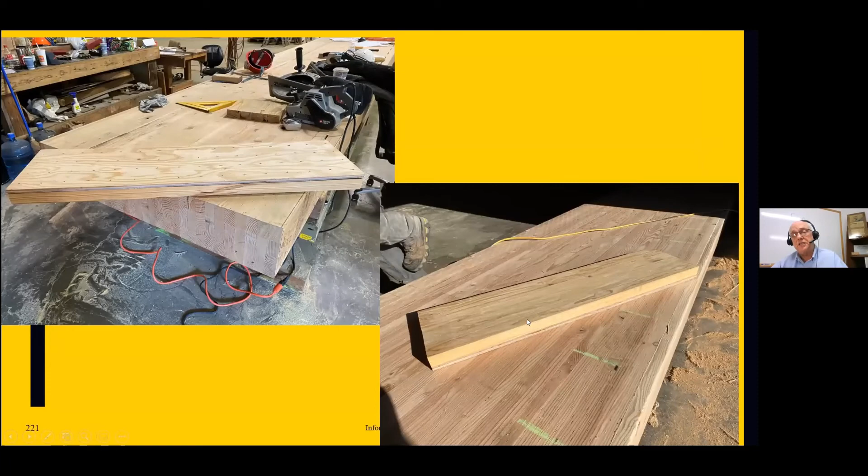That allows us to go on top of a column with what looks like a platform, reducing the effective shear in the element and getting a much more effective span and size of CLT panel - which of course it's all about size. If the size is governed by one individual area in terms of its minor axis, overcoming that problem gives a much more economical design, as you can see here.

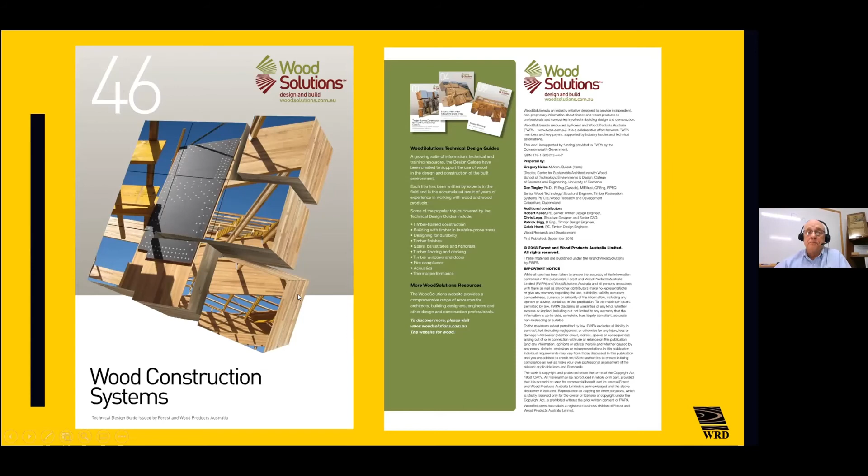And in Wood Solutions, we go through case studies of different buildings. I can't imagine 20 years ago, if anybody was talking to me about putting a swimming pool on the 16th floor of an all-timber building, I'd have laughed at them. But today, this is where the industry is going.

As I wrap up my session today, I want to talk about fire, which is another important area for us. As we look for a 1-hour, 2-hour, or 4-hour fire rating, the taller the building, the better our fire rating has to be, because people have to get a chance to get out if there's a fire.

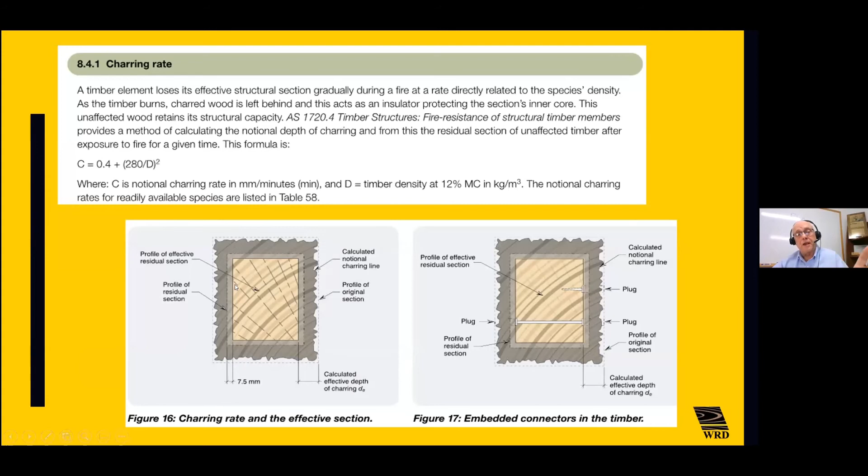Wood has this great characteristic in that it chars, and when it chars, it shuts down further ignition. In combination with that, when we have stick-built construction, we're used to using gyprock layers to create fire barriers for our systems.

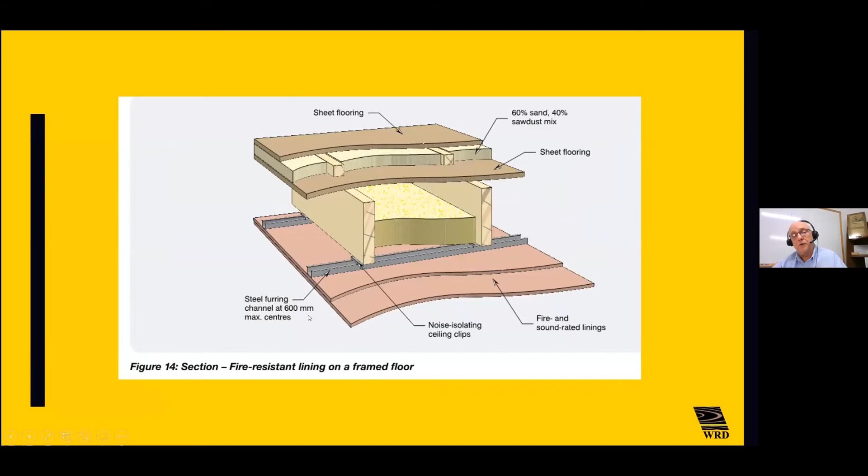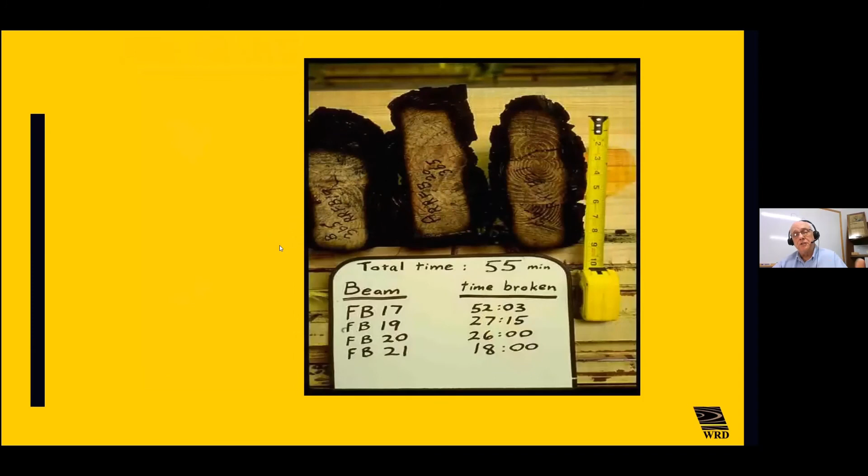How could this improve mass timber buildings? As you can see here, developing fire ratings in minutes, and this is high strength fiber here. These test results have led us to some very interesting results, in addition to the fact that we have this great insulation capacity of wood, it also has the ability to give us some great upsides.

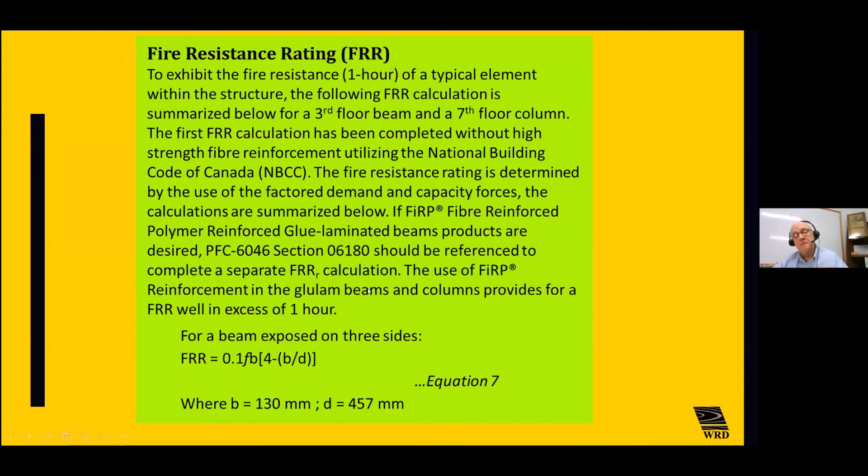I put this in here to show you: when we do a fire resistance rating and we're trying to get the 1 hour rating, for example, we have beams exposed 3 sides or 4 sides. We have a way with high strength fiber to be able to get across the line with our ratings. When we increase the strength and moment capacity of an element using high strength fiber, we get surplus capacity, and that surplus capacity leads to a higher FRR in minutes.

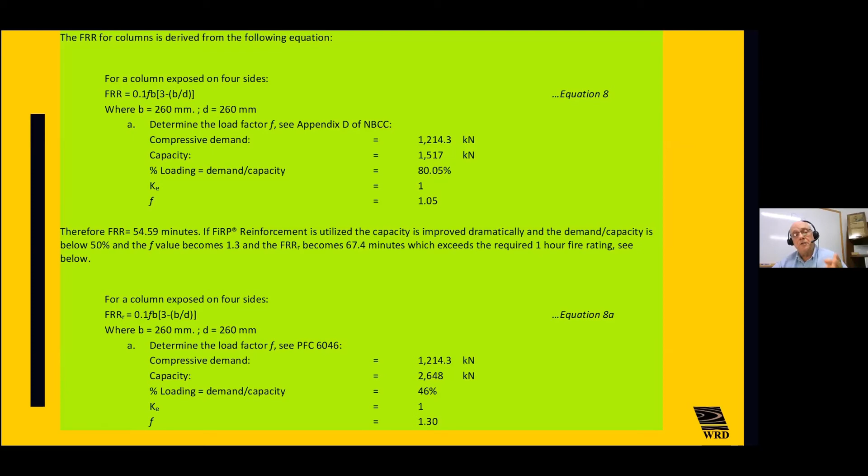So if we have situations where we are not meeting our 1 hour rating and we want to get across the threshold, we can use reinforcement and get there, as you can see in this particular element, going from 49 to 62 minutes. In this next element, a column exposed 4 sides, we can take it from 54 minutes to 67 minutes. So not only do we get increased capacity and reduced size, but we get increased fire resistance rating, which is another big aspect for these tall timber buildings we're getting into today.

So this is another tool for engineers' tool bag, the ability to improve fire resistance ratings without going to extremely large sizes and making the structure less economical.

And so with that, I bring this to conclusion. I don't know where I am in my timeline, Dave will tell me. I hope that I have not gone over time. I should have set my clock up, but I didn't. I'll be happy to take some questions.

Hey, you're right on time, Dan. Thanks, I always enjoy listening to your presentations. Thank you. Thank you. You're welcome.